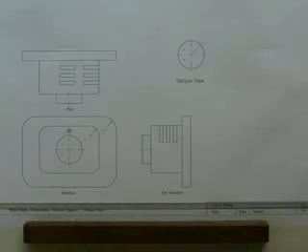Okay, this is D2, the thermostat control unit. What we've got here is an oblique drawing, which means that oblique drawings tend to be used when the main features are on the front of the drawing. And what you're doing is you're drawing the front and then you're projecting back at 45 degrees.

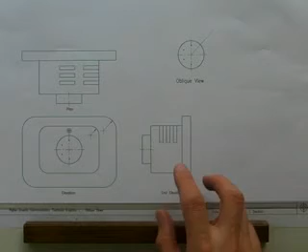Now normally for this type of drawing, what you'd be doing is halving the depth, so the distance between there and there would be halved. But it tells us in this drawing that we should use full length dimensions for oblique sizes, and I think that's because otherwise it's very small. If this was an exam and it told you that, then that's exactly what you should do.

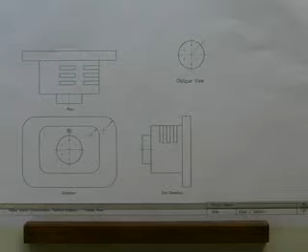Okay, first thing that I'm going to do is measure up a few things. I'm going to take this as being the front of this dial here. That's what that's meant to be at the front. And I'm just going to measure how far back it goes using my compasses and mark it on this 45 degree line here.

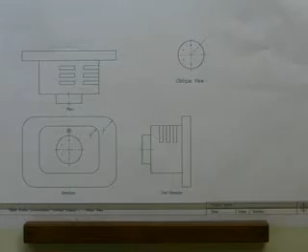Next, just to show you clearly for the video as much as anything, I'm going to mark on this a centre line about this point, so that you can see where this is going to go. Okay, so we've got a centre line on there.

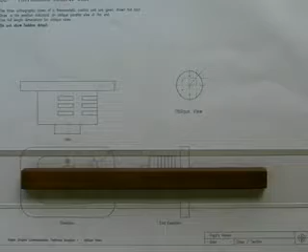I'm going to move this drawing down a wee bit so you can see a bit of movement in the camera. Okay, so moving that down there. Set the compass to the same size as the original, and then I'm going to draw a circle.

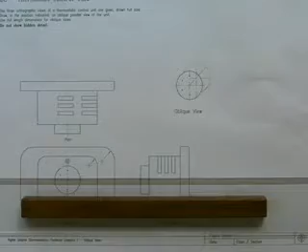Now watch what I'm doing here. I'm not going to draw it full, I'm only going to draw it till it cuts against there. Okay, now we know that this is a cylinder. And what I can do is basically...

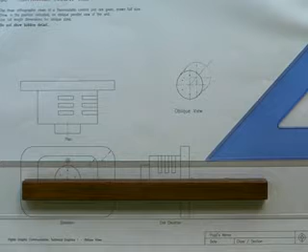Get my 45 square, if I mark a point there and a point there, these are what's called the tangent points, and that's the point where the edge of the cylinder would be seen. So I'm just going to draw a couple of lines there. Which means really the wee bit in there could be rubbed out just to remove it. So I'm just going to take that bit off and that wee bit off in there.

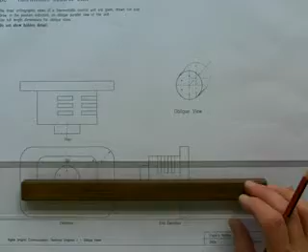And we can tidy all this up at the end when we firm things in. Just a line there, a line there. Okay, so that's the part that's coming out. Now I'm going to form up this bit here, which is the kind of main body of it, if you like.

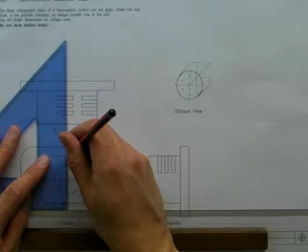And to help me do that, I'm going to draw some extra lines on here. This is just so that I can work out from this centre, which is basically that centre, how far out this rounded rectangle is. So, a couple of points here and here. So I know that from this measurement...

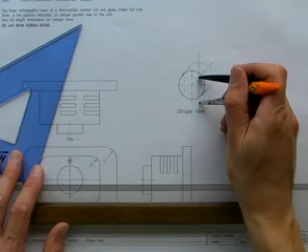If I mark on here, point, I really should extend this up and down to help me. So I'll extend this up and down here. So that's top, and because it's symmetrical, that's the bottom there. Okay, so I'm just going to do some construction lines here, here, and here, and then measure from here to here.

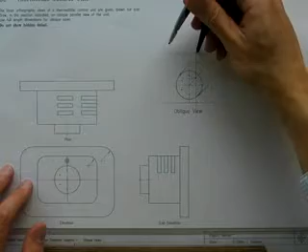You can see that, I should really do it that way, see it better. And then mark that on here, it's symmetrical, mark it on here. Let's draw down from there. Now you'll notice that it's a curve, and it's like a fillet on the edges there.

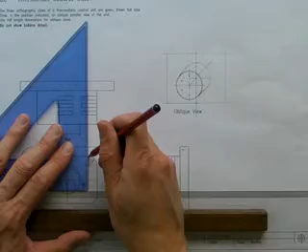So I'm going to fillet it, and the way that I do that is I'm going to look at this drawing here, extend these lines, you'll see why in a minute, and you can see that if I set my compass to that size there...

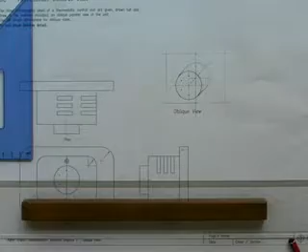Effectively that's the radius of the fillet. So all I need to do is do a wee mark there, a mark there. Connect these up. There's different methods of doing this, but I'm just going to do it using the set square. And then I just need to put my compass in there and draw, make sure the needle's in tight, and then just draw that round to there.

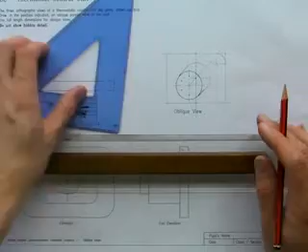Okay, I'll do the same at the other corners. I can extend that line down there to help me, and across there. And again, you can just measure up with this to see where the centre's going to be. And that across there. Mark that across there.

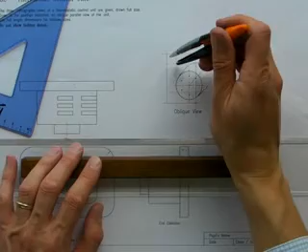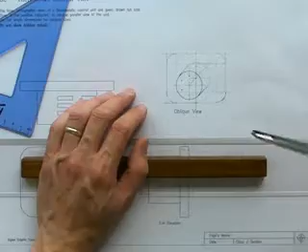That gives me all my centres for each of these fillets. So just draw them in carefully as you can. Just line this one up carefully. It's in the right position. Same again. Okay, now I'll just firm this in so that you can see it a wee bit more clearly.

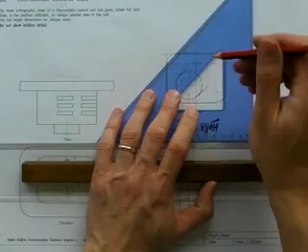Okay, right. Now what we need to do is extend this section back. So, using the 45 set square, draw a line back there, line back there, and a line back there.

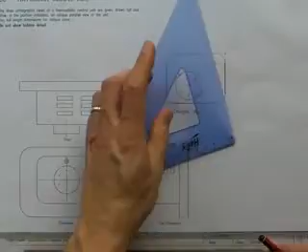Okay, now to find out how far back I need to go, I can measure from the plan, or I could indeed measure from the end elevation here as well, but just do it from here. So just mark one point there, and then one point here. That's fine, and then we just draw that down to there. These are just construction lines because remember it's a curved part.

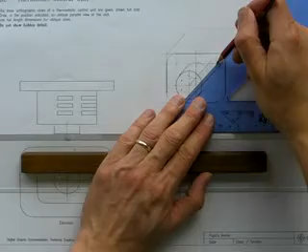What we're going to do now is I'm going to draw back this centre line as well, and you'll see why when you do that in a minute. Right, I'm going to mark on some points.

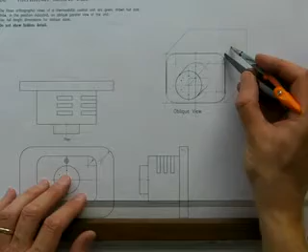Okay, so I'm going to measure the distance between there and there, to get the position of the first slot. Okay, and we'll mark that, and there, the end of the slot, mark it there, the next point, mark it there.

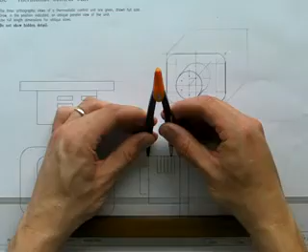Now, as I said to you earlier on, normally we'd be halving all these sizes because that's generally what you do with an oblique drawing, but it tells us to use the full size, so that's what we're doing. And then one more.

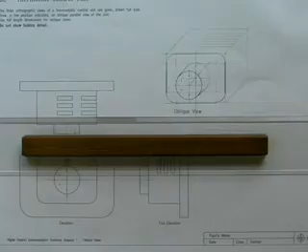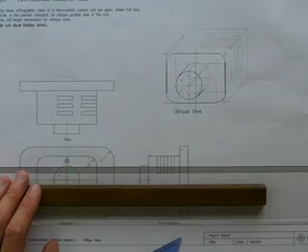Right, now what I need to do is draw in the curves because these are all curved off in actual fact. So if I extend this point and extend this point here, then what I can do is I now know where the curves start and stop, if you like. You'll see what I mean in a minute.